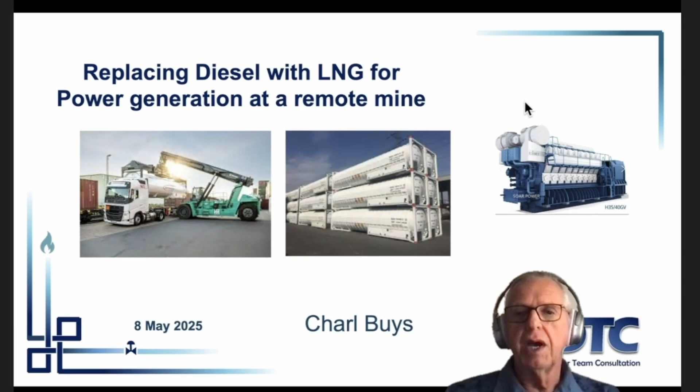Good morning, everybody. And natural gas powering progress, as Wilmina said, I think is important to reflect a little bit of what has been done and real case studies that have been done in Southern Africa. So replacing diesel with LNG in a remote mine, Northern Cape, what happened there? But before I start, just remember, the data cannot be guaranteed. This is public domain information, and you have to verify independently before you use the information.

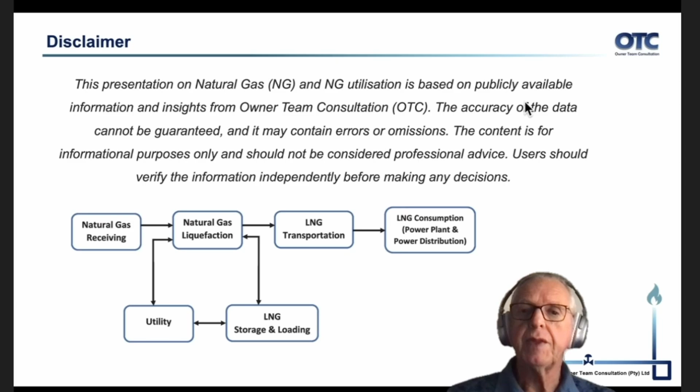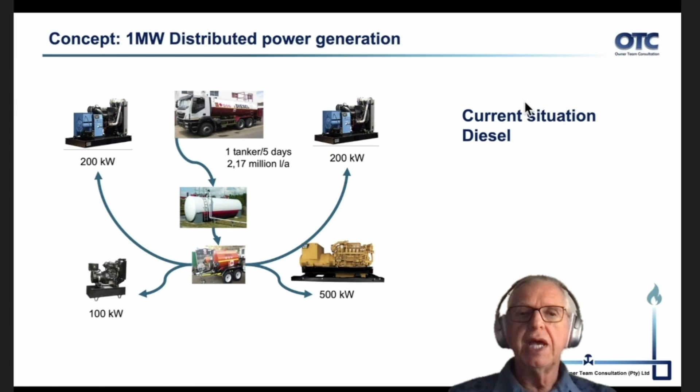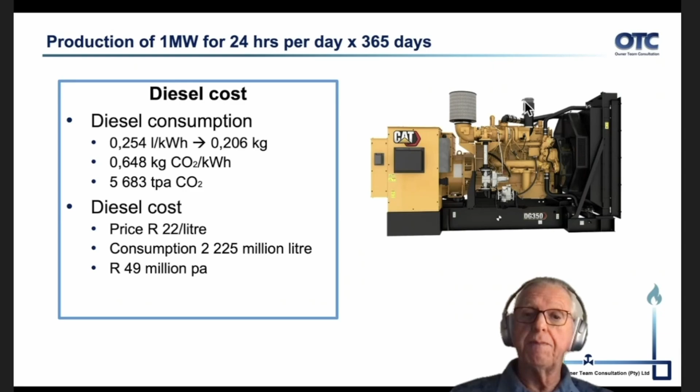On the mine as it is today, they have a 1 megawatt distribution system, 4 generators, one 500, two 200, and 100 kilowatt generator. Diesel comes in every 5 days in a tanker, bringing in about 2.2 million liters per annum. That's distributed with Bowser to the various generators on the mine, and the system is working. But the diesel cost at 0.25 liters per kilowatt hour gives you more than 5,500 tons of CO2 per year. And at the price of 22 Rand per liter, it costs nearly 50 million Rand per annum to run that system.

You want to change that over to LNG, it will mean bringing in an isotainer every 5 days, roughly 1,500 tons per annum of LNG. They will have to buy 4 new machines, exactly the same size, 500, 200 and 100, to distribute the system as it is today. An LNG vaporizer has to be installed, and a low pressure distribution system, which then will negate the problem of traveling and Bowser operation all the time.

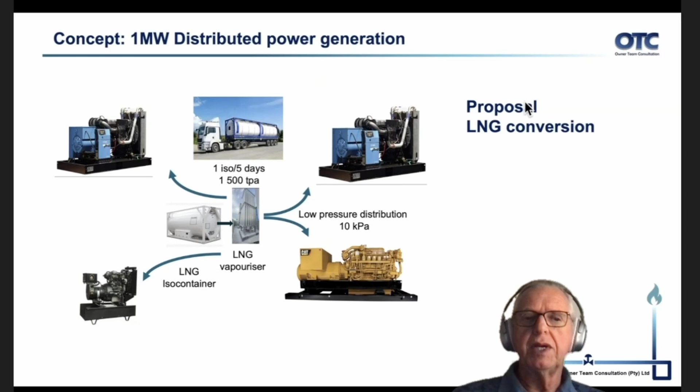Now, what's the price of the LNG that they will be able to land? And Petrus will talk about that and give us much more detail on it. But just roughly, if you buy LNG in Europe for $7 per gigajoule, and you look at all of the costs, port handling, port charges, freight, container rental, the whole lot, you'll be able to land it here in South Africa at about 350 Rand per gigajoule or $19. And in today's money, you might be able to buy it quite cheaper at Renergen at this stage of the game. And if the other potential LNG suppliers in the country come online one of these days, it should be cheaper buying from them as well.

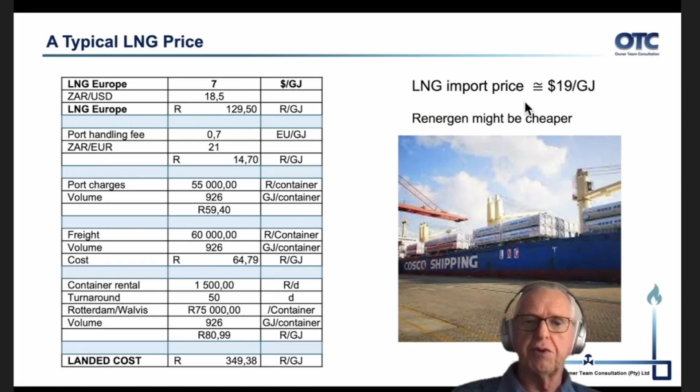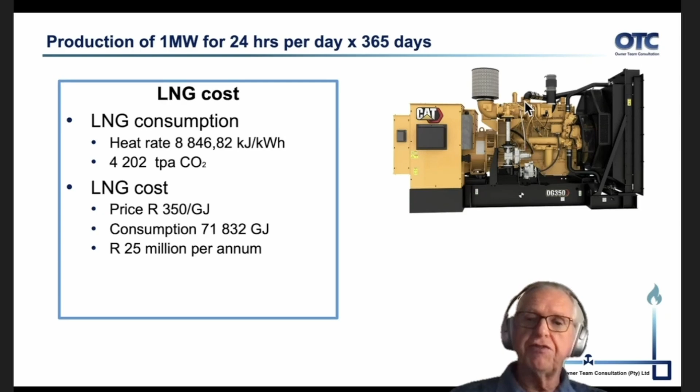LNG cost with a heat rate of 8,800 kilojoules per kilowatt hour will give you roughly 4,200 tons per annum CO2 production. And at the 350 Rand, it will cost 25 million per annum. So comparing the two systems, diesel versus LNG, you will have a direct fuel savings of more than 20 million, close on 24 million Rand per annum, plus a CO2 reduction of 1,500 tons per annum with the associated carbon tax savings that you will get.

In other words, comparing the direct generating cost, variable cost of the three potentially alternative sources of energy, diesel at 5 Rand 60 per kilowatt hour, LNG at 2 Rand 90 per kilowatt hour. And if you're so lucky to sit right on the pipeline, you'll be able to generate that at roughly 1 Rand 20 per kilowatt hour.

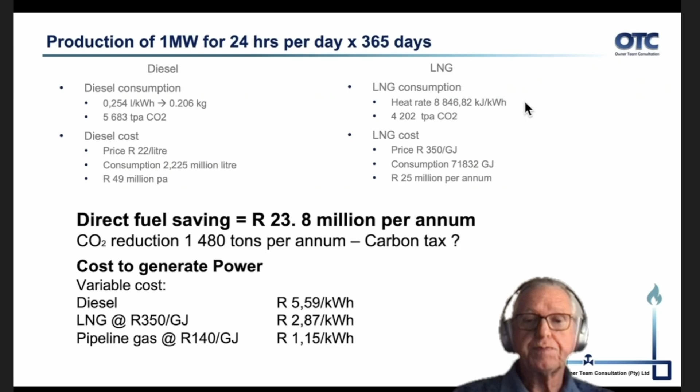But to change the mine over, they would have had to buy the 5 machines and install the vaporizer and distribution system. So looking at the capital, for them, it would have cost about 18.6 million Rand plus the installation cost, giving you 24 million capital outlay and a payback of roughly 13 months.

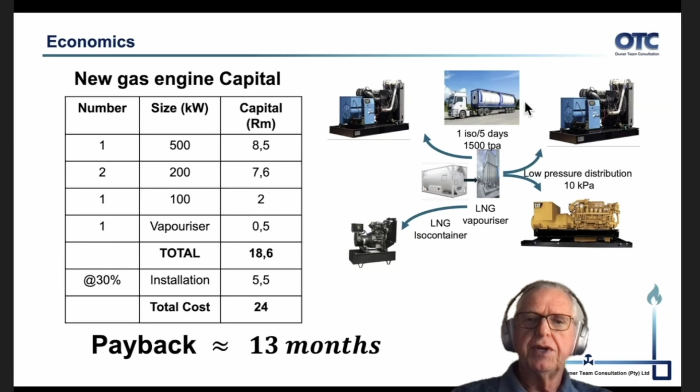But if you are cash strapped and you cannot generate that amount of capital to do the conversion for that size of mine, putting in dual fuel kits will cost roughly 1.1 million Rand for the mine, plus installation costs giving, say, 1.3 to 1.5 million Rand. And in the dual fuel conversion, it will save 50 to 70% of the diesel costs and a payback of less than a quarter.

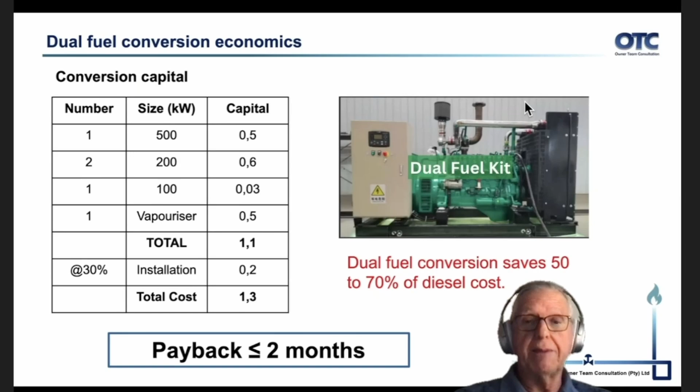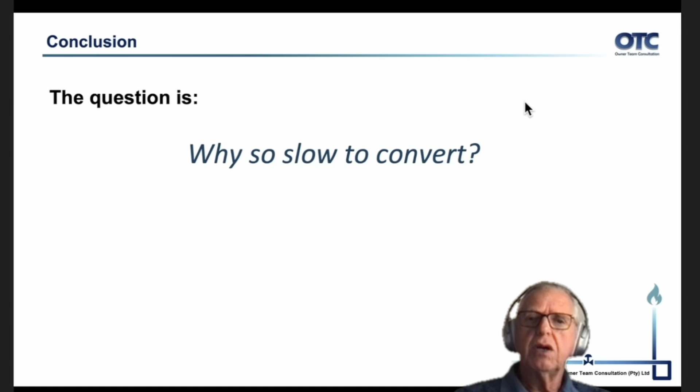That sounds absolutely excellent. So the question really to ask after having done this very practical case study on the mine is, why so slow to convert?

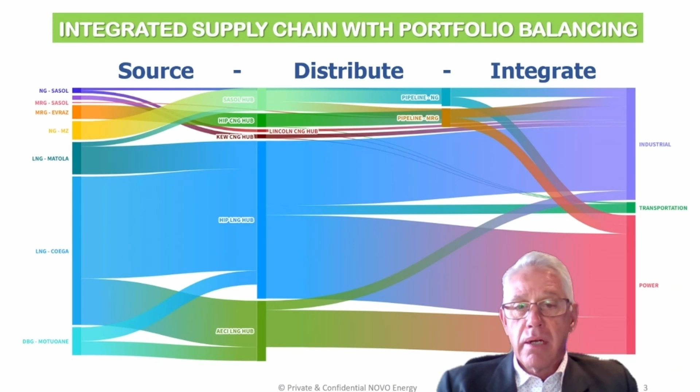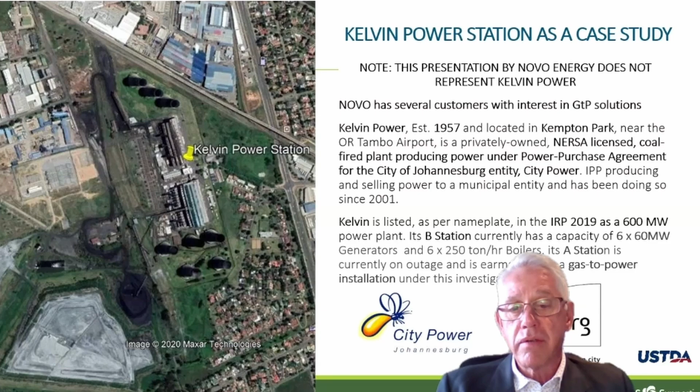So the challenge that you face when you start looking at Kelvin is that you need to have an integrated approach. So NOVO's experience in operating in an integrated environment equipped us quite well to actually pursue this feasibility study. So first of all, on the gas supply side, obviously making sure where's the gas going to come from, is there sufficient volumes, gas security, when the gas will be available. And obviously the second leg is how do you get the gas there, how do you handle that? Is it pipes, road, rail, third-party access on other pipelines?

And then on the power configuration side, what is the optimal station to build from a commercial, financial, technical, environmental, etc. perspective. So quite a complex problem statement that we had to address.

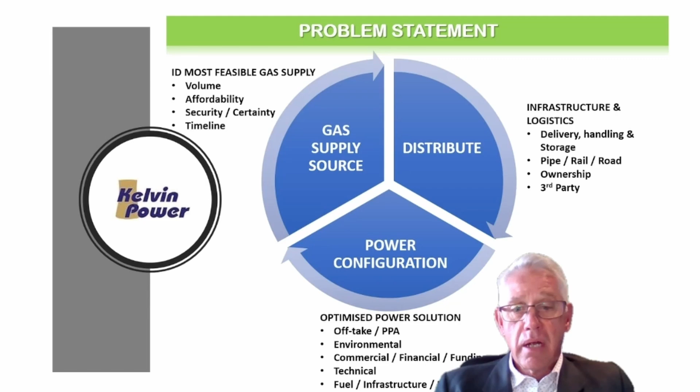So the methodology that we followed, we were fortunate to engage the US Trade Development Agency just around COVID, and we put together quite a comprehensive feasibility study on this. We've since updated the study recently, but in the study we looked at regulatory aspects, market economics, gas infrastructure, PPAs, contract structures, financial models, etc. So almost a bankable feasibility study. Specialist studies on environmental aspects, for instance.

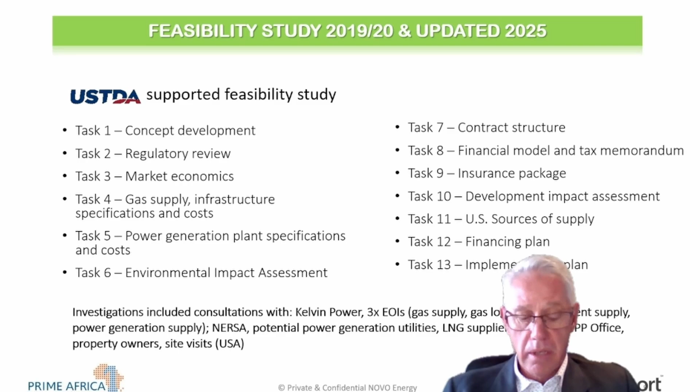So we went out to market, expressions of interest, gas supply, logistics, power equipment, NERSA, a lot of interaction with Transnet, IPP office, etc. So we believe it's the most comprehensive feasibility study done on an integrated gas to power station in South Africa. So the first problem we had to solve was, where's the gas going to come from?

So we interrogated the potential opportunities, whether it's coalbed methane from Mozambique, Botswana, indigenous gas, Renergen, Biogenics, imported LNG, pipeline gas, additional pipeline gas, and that gave us very complex logistics permutations on how do you get the gas there, whether on pipeline, road, rail, liquid gas, compressed gas, permutations of that, and then how do you finally actually get it to the power station. You can understand the complexities of getting liquid gas from coastal areas into Kelvin.

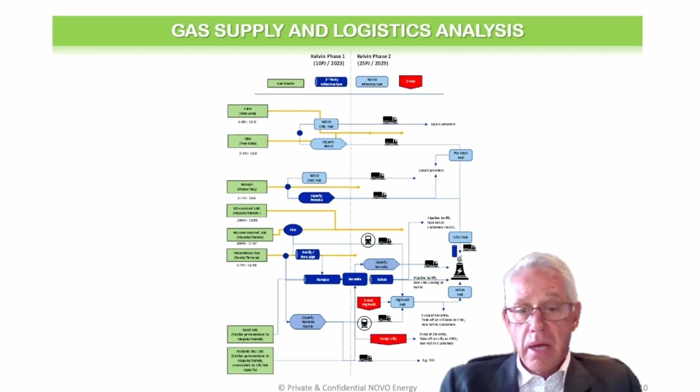And secondly, we had a look at the power generation configurations. We settled finally on a GTA combined cycle. At altitude, we could get efficiencies between 54 to 64%. Efficiency is very important because that obviously drives the price. And the GTAs also give you other benefits. They're robust, they're scalable, you can phase them.

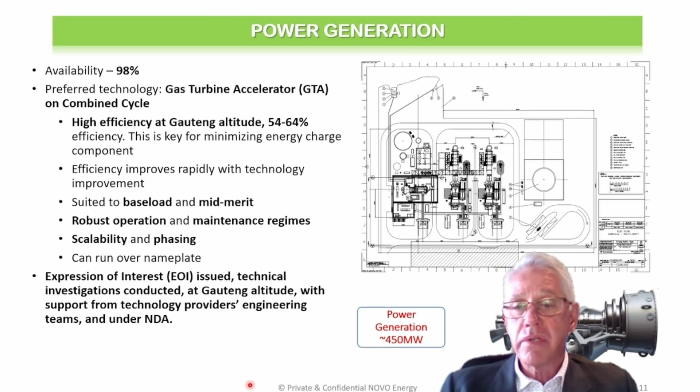So for this study, in this particular model, we looked at a 450 megawatt, 2-by-1 configuration, 2 gas, 1 steam, and a lot of inputs from the OEMs and technology engineering suppliers.

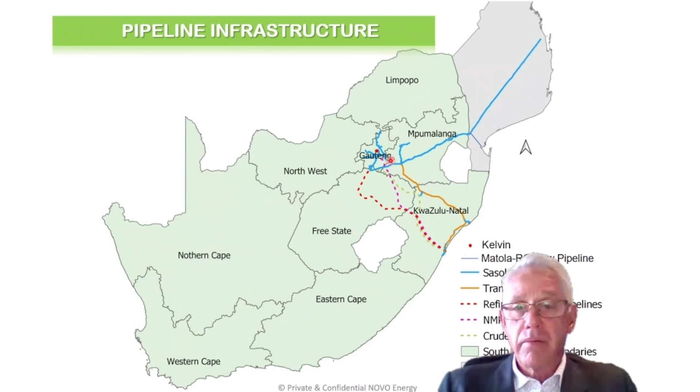So some of the interesting results that came out, you would be familiar with the pipeline infrastructure, ROMPCO, the other pipelines. So if you zoom in a bit, ROMPCO running into Secunda, and then the SSP, Secunda Springs pipeline, and Kelvin right at the end of that spur. And the challenge was that the pipeline running past Kelvin is a 6-inch, quite an old pipeline.

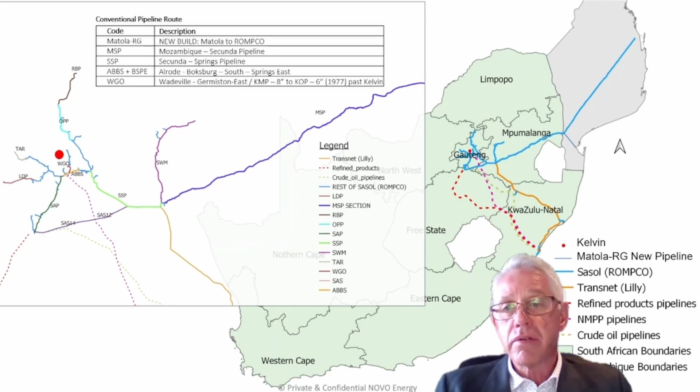So very early, we started having doubts about the ability to actually move gas into Kelvin on pipeline, from a technical point of view, but also financial and commercial considerations, encroachment on the pipe network, as well as upgrades required, and trying to push the gas all from the back end from the coast to the end of the network.

If you look at some of the estimates, these are some recent estimates. Looking at a scenario from BGC terminal fees, plus all the tariffs on pipeline, you probably end up around a total tolling charge of between $7 to $10. So that's just the cost to actually move the gas from the coast inland.

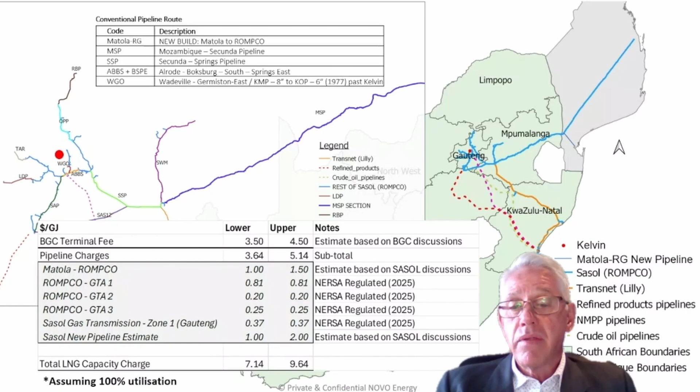We then realized that the most feasible solution would be a small-scale LNG solution. And the basic concept of the solution was that from an import terminal, having gas on wheels into inland storage terminals, or gas hubs as we call them, and then final delivery into Kelvin on a regas, on a pipeline, or even on a shuttle road service. Plus, we designed a backup virtual pipeline directly from coast into Kelvin.

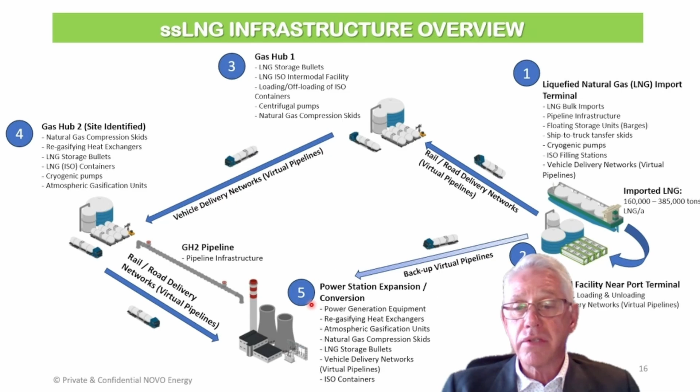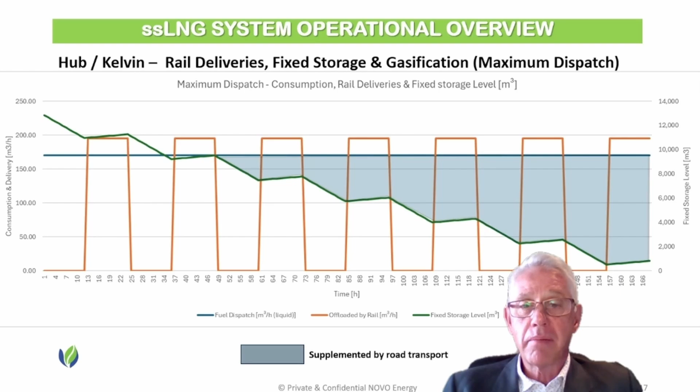So just in conclusion, perhaps one of the interesting insights is that we've proven that if you follow an integrated approach to gas to power, LNG, from port to power station, you can actually prove that it's feasible to run a base load gas to power on small scale LNG. This is just the delivery costs. Typically, landed LNG, $9 to $11, $8 to $12 for small scale solution. Efficiencies, exchange rates, returns on investment on the power side.

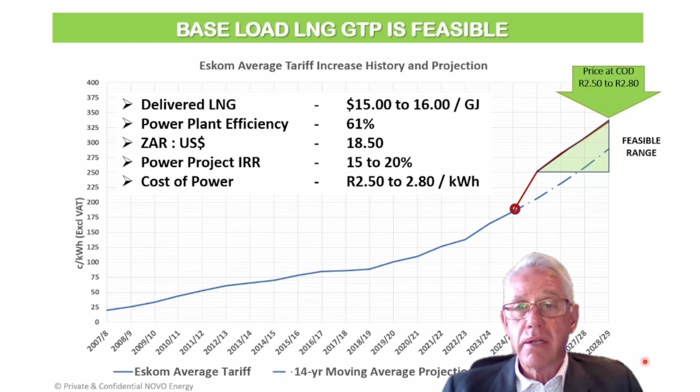And that gives you a cost of power around R2.50 to R2.80, which is, Charles, I think your number is also in line with that. So that shows that there's definitely a feasibility range where you can make small-scale LNG baseload gas to power inland work at R2.50, forecasted at time of operation, well within range to actually make it work. So this is a proof that even inland you can do power generation using small-scale LNG.

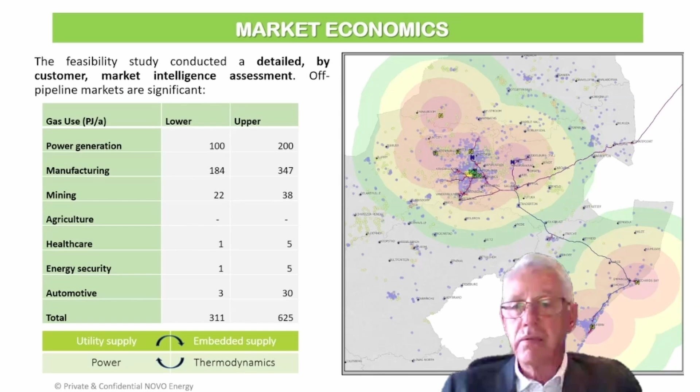One addition of the study was to look at the market economics. So we generated the GIS, 15,000 customers. This heat map just shows you where all the energy users in South Africa are. This is just Gauteng, KZN, Mpumalanga. A massive potential market, hundreds of petajoules of gas. And we've also started seeing a new energy ecosystem where thermal and power integration embedded in generation, a very large demand. So out of this, NOVO then actually proceeded to develop our first LNG inland terminal.

We've received environmental authorization for a terminal, 500,000 tons of LNG per annum throughput. It's based on our existing compressed natural gas operation. It's just a picture of an 18-bay CNG operation, and then an integration onto our CNG operation, LNG storage, rail infrastructure. The site is easily accessible from Matola, Coega, and Richards Bay. Surrounding customer base, potential for large evacuation of power on the site as well.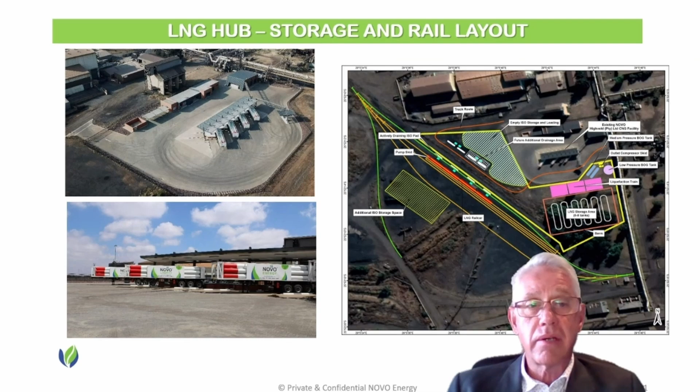We're very bullish about the future of LNG, especially small-scale energy. And I think matching this with our existing operational capability of gas on wheels and moving gas around, very excited about the future. Thank you very much.

Thank you, Andre. I really loved where you said you interrogated opportunities where the gas can come from. And it shows me what detailed study you've done, you and your team, to be able to get there. I'm definitely going to use that strategy when I have to interrogate options. And it's so positive for me, because often industries are scared of change. I normally say one change leads to another. But you guys have closed the loop on that and you've changed, and it actually had so many benefits. Thank you for that.

Last but not least is our next speaker, my new colleague, Mr. Petrus Scholtz. Petrus is a graduate chemical engineer with over 35 years of experience in the fertilizer industry, refinery, production planning, process engineering, project management. He worked at Sasol Fields and FFS refineries. He was responsible for raw material procurement, marketing, sales, technology. He has extensive experience with LNG, and he championed the first successful South African trials on small-scale LNG imports.

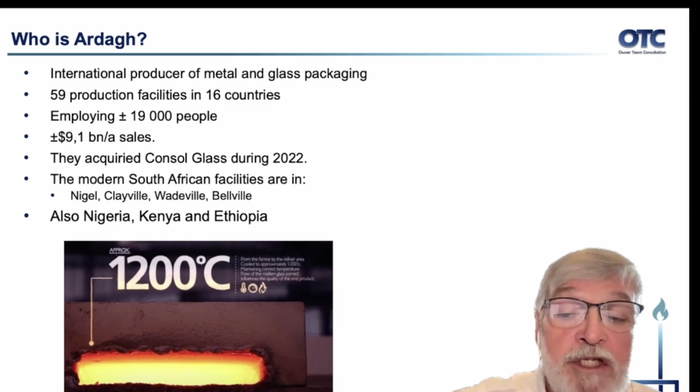It is quite clear that gas is the preferred fuel of choice for glass furnaces, but because it's not available in Bellville, they can't use it at the moment. All 4 of the South African Ardagh production facilities are also fitted with ESPs, and this allows them more freedom and fuel choice while not putting their air quality standards into jeopardy.

So if we look at the LPG uses in Bellville, LPG used to be the only suitable fuel available for glass conditioning and annealing in Bellville. The LPG they used is produced by the South African oil refineries, and volumes are supplemented by imports. During the 2019 and 2020 COVID period, the refineries went into low production mode, some closed down, and LPG imports were really difficult during that period. Internationally, everything closed down, and there just wasn't any movement.

This presented Consol with a huge potential problem should they run out of LPG. Remember, it was still Consol in those days. Their furnaces in Bellville can have up to 500 tons of molten glass per furnace at any point in time. So to have that unit running out of gas and shutting down is a major, major concern, and it's not a consideration. So a strategic decision was made to find an alternative gas fuel supply to supplement or to replace LPG.

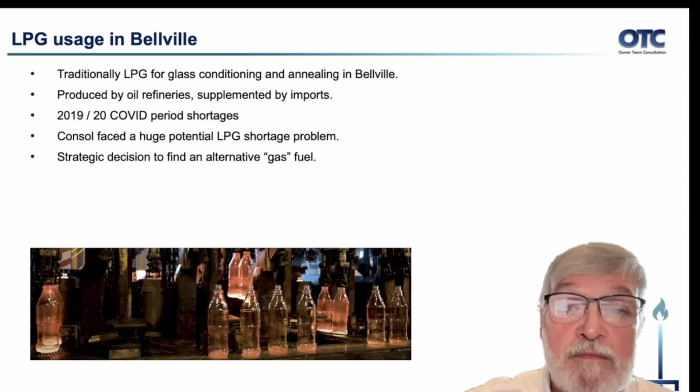At this stage, Renergen started to produce, and they were the only local producer of LNG in South Africa. However, due to the initial startup challenges, the LNG production was somewhat intermittent. However, an agreement was still reached with Renergen to supply LNG to Bellville, and due to the intermittent nature of the supply, to also build and fund the required storage and reticulation facilities. Consol at the time agreed to pay for the installation as an additional levy over a period of time, just to make it a bit easier to get into the system and to use the product.

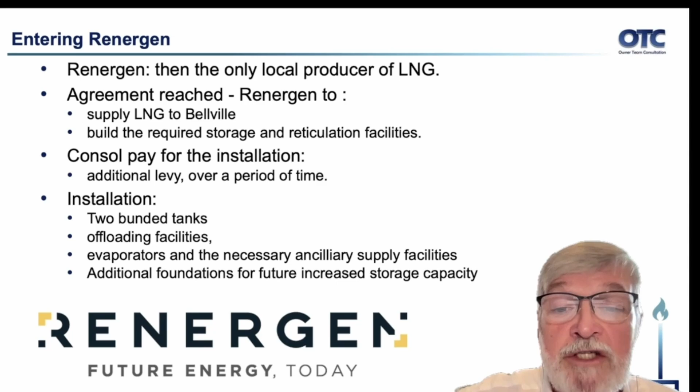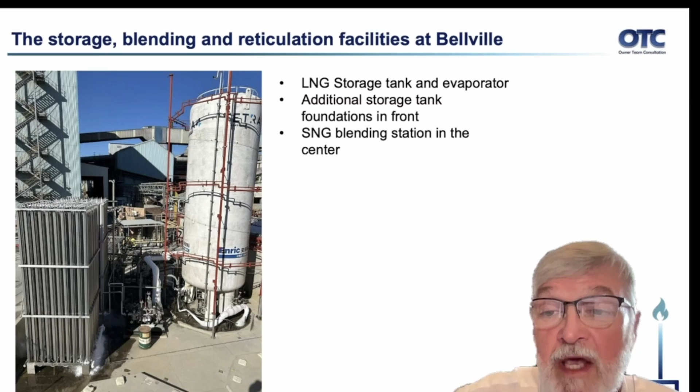So 2 bunded tanks with offloading facilities, evaporators, and the necessary ancillary equipment were installed by Renergen. They also supplied additional foundations for future increased storage capacity when needed. Here you can see the facility with the LNG storage tank, a blending facility at the bottom, and the evaporator on the side.

Due to the potential intermittent LNG supply, it was necessary to design the system to allow for LNG and LPG to be interchanged without causing process disruptions. A blending station to allow for the LNG and the LPG to be switched at will was also included in the design. However, the different properties of the two gases, such as the density, the flame speed, the CV, made it very difficult to use these two gases together.

If you just blend them as is, you will have a continuously changing density, changing flame speed, changing CV. You can't set the burners all the time for those changing conditions. So the burners were actually retrofitted to run on a regasified LNG, meaning that the LPG had to be modified to make it suitable for this application.

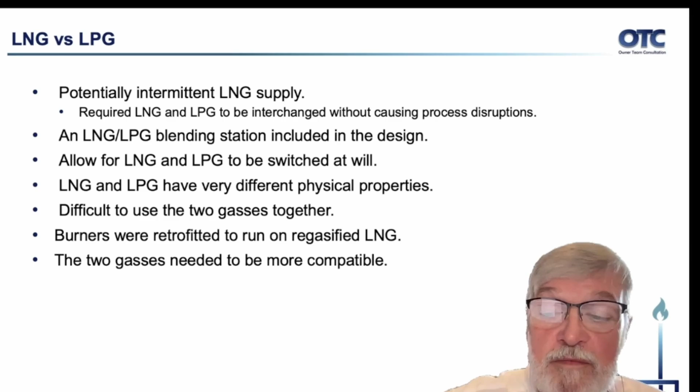So if we look at the properties of LNG and LPG, the main component of LNG, natural gas, is approximately 95% methane. LPG is a propane-butane mix. Sometimes we only get propane in South Africa. The specific gravity of the natural gas is 0.55 and 1.52 with LPG, a significant difference. The high heating value of natural gas is 39 megajoules per cubic meter compared to 93.

Flame temperatures are very much the same. And then the Wobbe index, which I'll talk about a bit later, is also quite different, 48 to 55 on the natural gas and 75 to 87 on the LPG. So it's very obvious that these two products are vastly different and just can't be blended together as is.

So here the Wobbe index comes into play. The Wobbe index is a corrected, calculated heating value, taking the density of the gas into consideration as well. So the Wobbe index allows the interchangeability of different gases to be measured. This is calculated as a higher heating value divided by the square root of the specific gravity.

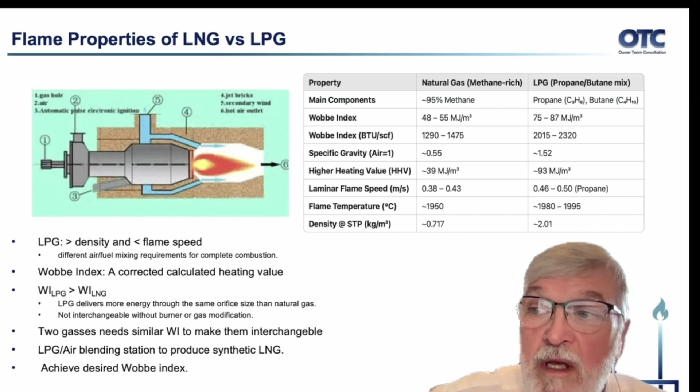LPG has a much higher Wobbe index, as you can see on this table as well, 2015 to 2320, compared to that of natural gas of 1290 to 1475 BTU per scf, or you see the numbers there in megajoule per cubic meter. So LPG and LNG are clearly not interchangeable without burner or gas modification, unless we can match the Wobbe indexes in a different manner. In order to make the LPG fully interchangeable with the LNG, it needs to be modified and have a similar Wobbe index.

An LPG air blending station was then introduced into the design, and that will produce what they call a synthetic natural gas. That could be blended to the desired Wobbe index, and then you can get it as a side stream to blend into the LNG directly. So the synthetic natural gas is produced by vaporized LPG, and that is then added into compressed air, which has been dried and filtered, via 2 control valves into a mixing chamber to produce your synthetic natural gas.

A typical blend in this case will be about 55% propane to 45% air. And this physical dilution lowers the calorific value and the specific gravity of the mixed LPG to the SNG, and that makes it then suitable. You can control this blend very, very well. It's a very easy way of controlling it, and you can get the Wobbe index controlled to a very, very tight specification. The current setup is to do a Wobbe index of about 48 to 55 to match that of the LNG.

Because there's no reforming chemistry involved, the LPG air mixing stations, like I've got here, are very compact. Come on. They can start and stop within minutes, and they are widely used as peak shaving or emergency backup systems where natural gas supply is limited. This is a very neat, handy solution to actually a big problem.

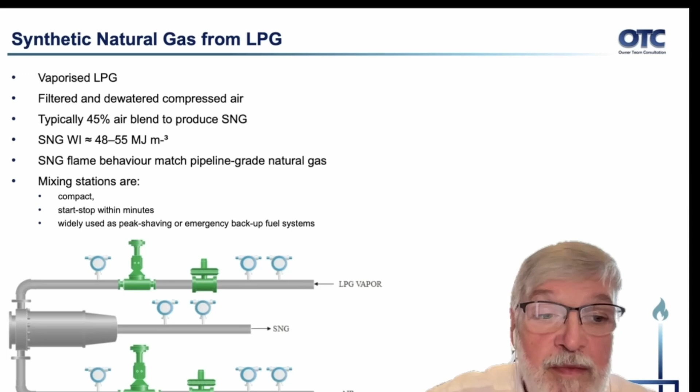Sorry, I've got finger problems.

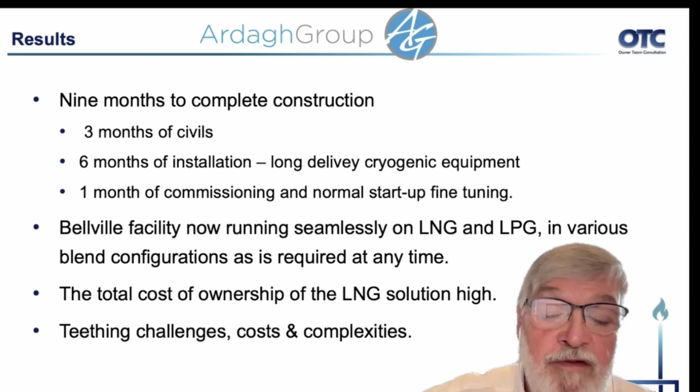If you look at the final project, it took about 9 months to complete. 3 months of that was spent on civils and 6 months on the installation. A fair amount of this installation time, however, has been due to waiting for long-delivery cryogenic equipment, not so easily available everywhere in South Africa. And after about a month of commissioning and normal startup fine-tuning, the Bellville facility is now running seamlessly on LNG and LPG in various blend configurations as is required at any time.

The total cost of the ownership was quite an interesting one. The LNG solution is definitely not more economical than running on LPG at this point in time. It's partially due to the conversion having had a lot of teething challenges, costs, and complexities. However, it has given Ardagh flexibility and risk reduction. And this risk reduction has been required for continuous uninterrupted glass production, and they've succeeded in doing that.

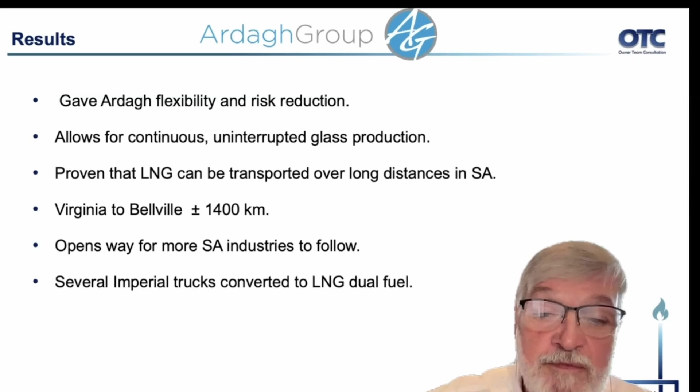It's also been proven that the LNG can be successfully transported over long distances in containers. In this case, the Virginia to Bellville route is about 1,400 kilometers. So having proven this as well, it allows for LNG, once more available in South Africa, to be supplied to almost any facility right throughout the country. As it is, several of the Imperial trucks dedicated to Ardagh have also been subsequently successfully converted to LNG dual fuel. So this is really a success story, and it's finding its way to other industries as well.

Finally, I would just like to give acknowledgement to the Ardagh management team for the open and cordial discussions around the LNG project, and allowing us to use that experience to showcase this successful changeover. Hopefully, this is also a learning to others who are contemplating such a move. Thank you very much. I hope you enjoyed it.

Thank you, Petrus. Yes, what a neat solution that makes it work. And change is not necessarily always a scary thing. Just put the right engineer on the job and you are ready to go.